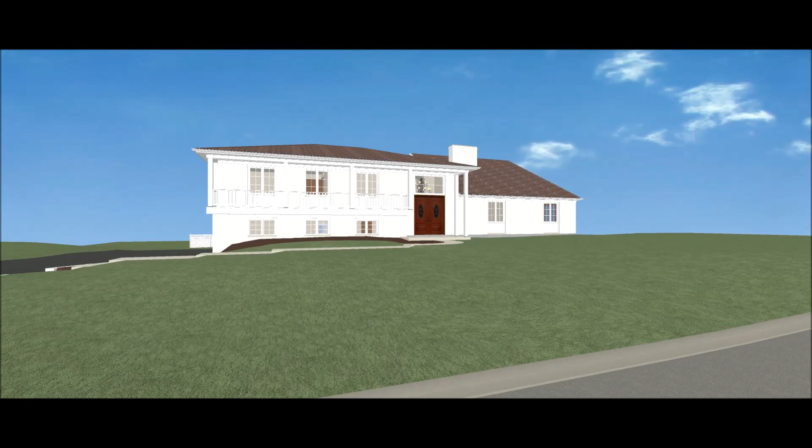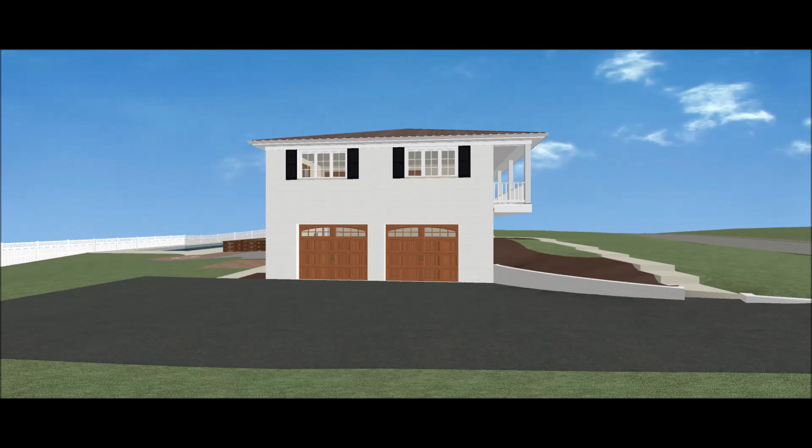Alright, I've finished constructing this model and the necessary out structures and terrain that I thought was going to be having to interface with any new structures we put together. Some of this wasn't entirely necessary, but most of it was because of the scale of the project and some of the future plans, both on the first floor and at that second floor level.

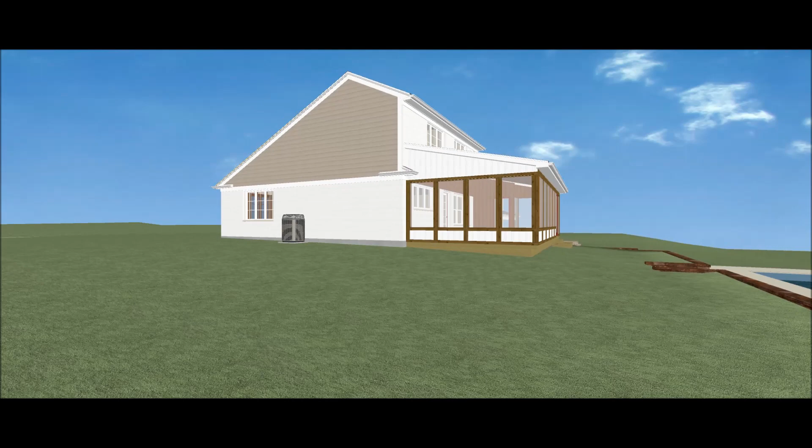And as I went along adding these pieces, I was glad that I did, because there's so much going on, and I want to make sure that whatever we add going forward actually brings all of this together in a nice, functional, and aesthetic way. And so this, the first in probably a series of films, is really just an introductory type of thing, introducing some of the challenges that we're going to be facing, and some critical pieces that probably have to be decided fairly early on.

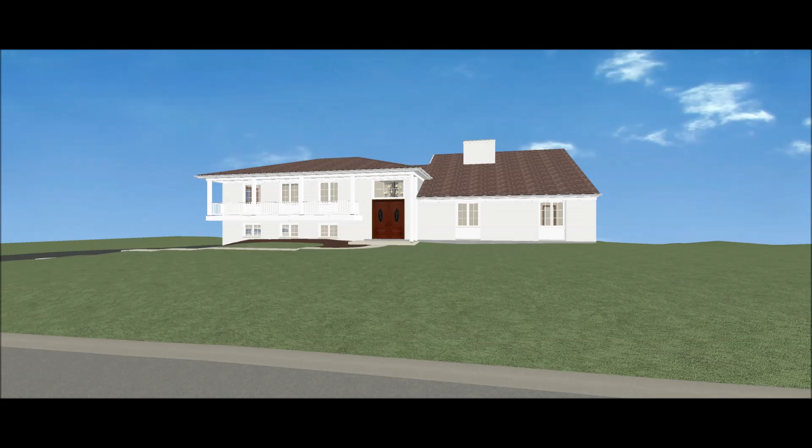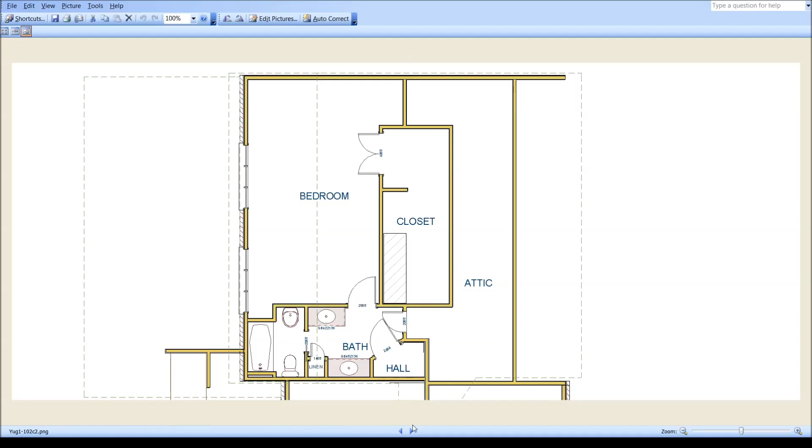So I've gotten all three of these floor plans, the lower level, the mid-level or the main level, and the second floor level, constructed, and everything agrees within about an inch or two, which is kind of necessary to make sure that we understand how everything's being put together. And going forward, we'll be concentrating mainly on what we'll call the second floor and the first floor, even though this first floor extends down to this lower level.

So mostly we'll be looking at this, and obviously the covered patio isn't right outside of bedroom 3, but outside of the lower level. But for the sake of clarity, we'll just work with this level here in terms of this first floor, since we're starting from a kitchen design standpoint anyway.

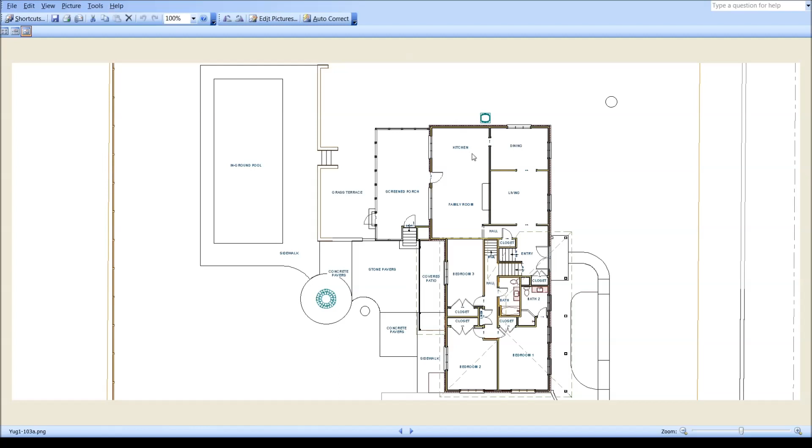Part of putting together all this stuff was making sure we knew exactly where these different levels were and how they interfaced with one another. And all of this can stay, and we're going to be building around that and hoping to make these places or these spaces work together.

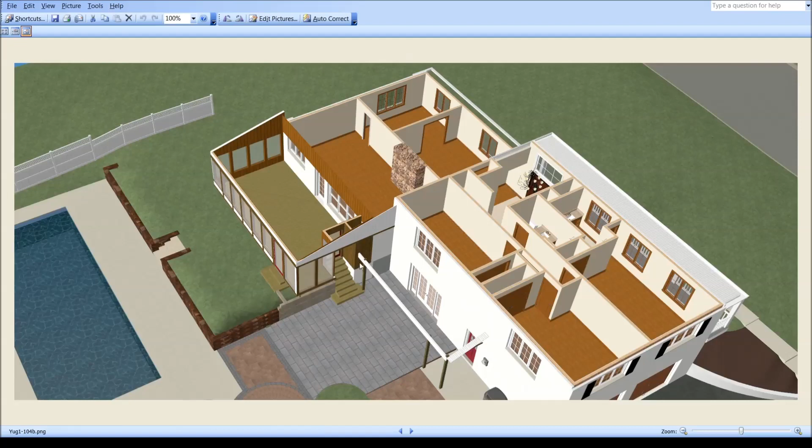And while this is a short film, there will be a number of things that I'll be trying to cover, kind of unrelated, but I can't help but at least address a few of the things that I saw while I was out. We have already talked about whatever happens up here. We know those stairs, I haven't even modeled those because we knew that we were going to be changing those to be code compliant. They're too steep right now.

From out here, one of the first things that struck me, and I'll just cover this stuff randomly. For one thing, I noticed one of my photos shows this piece here, there doesn't appear to be any kind of flashing between the new Hardie siding up here and this piece of frieze board here. It seems to me there should be some sort of Z flashing in there, because otherwise you're going to have to either caulk that or rely on I don't know what to keep the water from going back behind that board. So that was one thing I saw.

But the juxtaposition of these two pieces, they don't seem to work that well together. The higher pitch slope here, and so they're competing for power at the front, and so hopefully we can get that a little more balanced going forward.

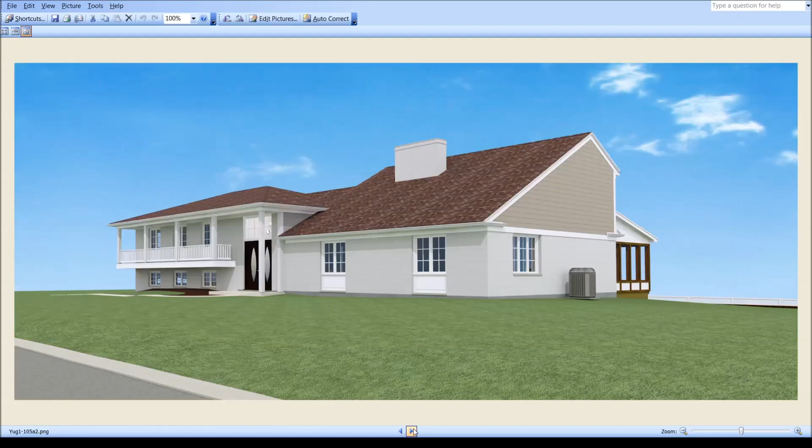So while our go-in project is this first floor addition to the kitchen and the family room, it's going to be impossible to look at that without looking at this at the same time, and it actually begins to occur to me it may be, not impossible, but a lot more challenging to construct those as two separate projects. And I'll try to show you why going forward.

But I do have some exciting ideas of how all of this can look together, and I'm eager to try those out, but I just want to show you some of this early stuff right off.

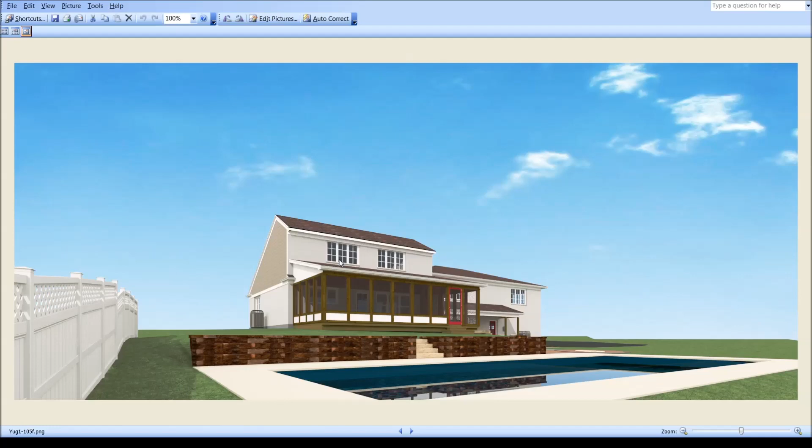So first, as a matter of course, I checked these member sizes, these 2x10s at 16 inches on center over the garage, and cantilevered here and here, and these ones that are under the second floor and over the kitchen and family room, since we're going to be dealing with suspending those or doing something to handle those.

And these are 2x8s at 16 inches on center. And these are the labels. 2A, these are the ones that are underneath the bathroom portion of that second floor, and these are the ones that are under the bedroom portion of the second floor, since those are different loading requirements by code.

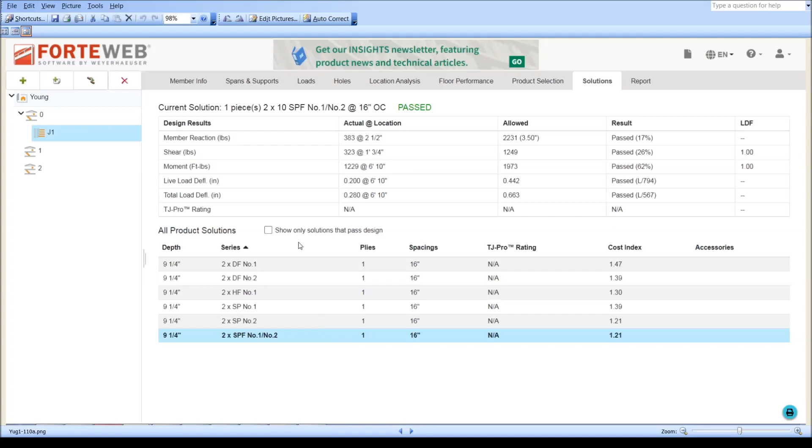And so, as expected, the ones over the garage and over the lower level underneath those bedrooms on the main level or the mid-level, those all pass. Even the lowest grade of them passes at that span. But when we come to the second floor, these J2A, these are the ones under the bathroom, which require a little heavier loading. And I select this in a program I use to check and size these members.

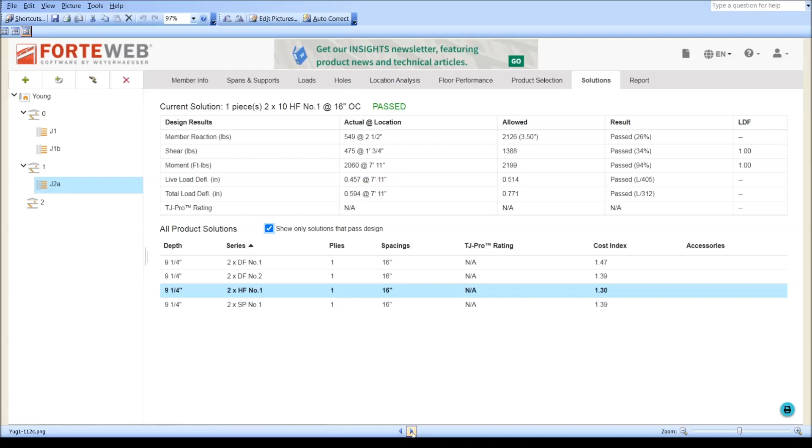And I check either 2x8s or 2x10s at 16 inches on center with a single ply. The only thing that's really going to pass is 2x10s. If you check this off and get rid of the ones that are not passing, only 2x10s will technically pass, crossing over that kitchen and family room area. And you can see if I go to 2x8s, which is what exists up there, and it exists as Southern Yellow Pine, none of these species are passing right here. They just don't pass 2x8s.

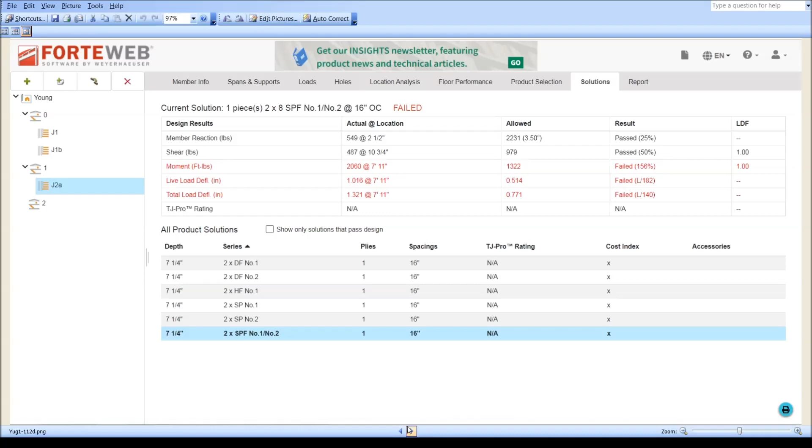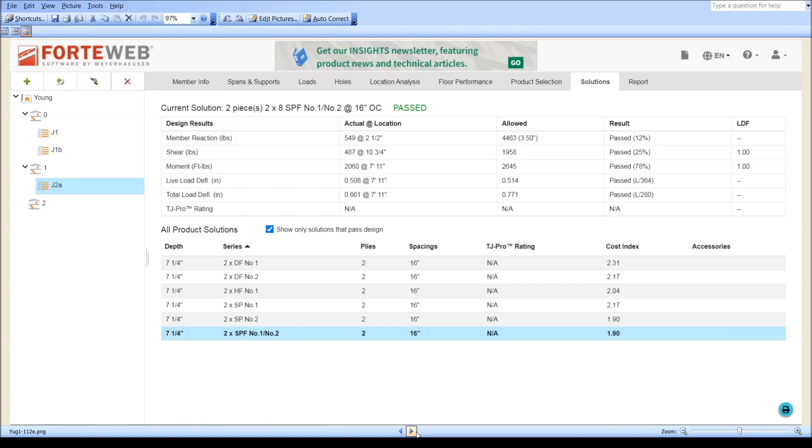Now, the one way to get this 2x8 situation to pass without increasing the depth of that diaphragm, we could double the 2x8s, and that means either removing that floor or removing the ceiling, so it's not going to be painless. But to get those to pass, and I think they're going to require them to pass in the new plan. And I know that probably wasn't too clear,

but just so you can understand, if I go back and specify the best case scenario of what you have, which is Southern Pine as those floor joists, 2x8s, 16 inches on center, and 1 ply, these are the results we get for under the bathroom areas, and you can see that its failure here is by about 400 or 500 pounds per joist, and other failures down the road, and that's for the ones that require the heavier bathroom loading. But even the bedroom ones are still failing by pretty substantial numbers.

So, that being said, and you being aware of that, if you are not inclined to replace them, it may be possible to double them, or replace them, or add 2x10s, or whatever the solution might end up being. If you're unwilling or unable to do that, I will have to double check, but it may be that they will allow those as existing members. However, I kind of think they may not, because we are thinking about increasing the size of that bathroom, which would be changing the configuration, adding loading to some of those joists, and adding loading beyond what is passing or what is allowed by the code.

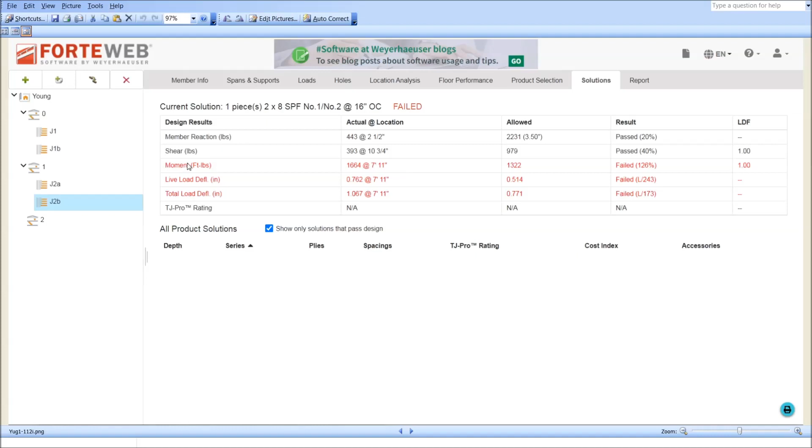So my tendency is to think that they're not going to allow us. They'll allow them to stay there, but I don't think they'll allow us to change that floor plan and add any new loading to them.

So what this means in terms of the construction, in terms of the design, is that has to be accounted for up front, what we're going to do with regard to that, and what it would require to get it completely in code and nice and rigid for your own use going forward. I mean, you probably feel more flex up there than you really ought to in a bedroom area. But what it would require then is removing all of that and just dropping new 2x10s in. I would just drop 2x10s across the whole thing rather than trying to double up 2x8s along each one.

There's probably going to be some mechanicals, wires and stuff to deal with. So there's a lot to consider with regard to that, and I'm sorry to say that. And additionally, with this second floor piece, one of the things that concerns me about this room is that apparently these members were taken out.

You know, a person might think those were just decorative, but I'm not an engineer, but it seems to me that those were probably structural members. I don't know if they did this renovation project, removing those and moving the walls around, under a permit.

But when you look at this situation here, which I don't quite understand, I don't know if they've removed all these, but all these pieces up here and all these pieces down here, I have a feeling that those were pretty integral to that structure. And maybe that's why those 2x8s were passed. Maybe this was even done under a permit. This was back in '97, so I don't think there's going to be records.

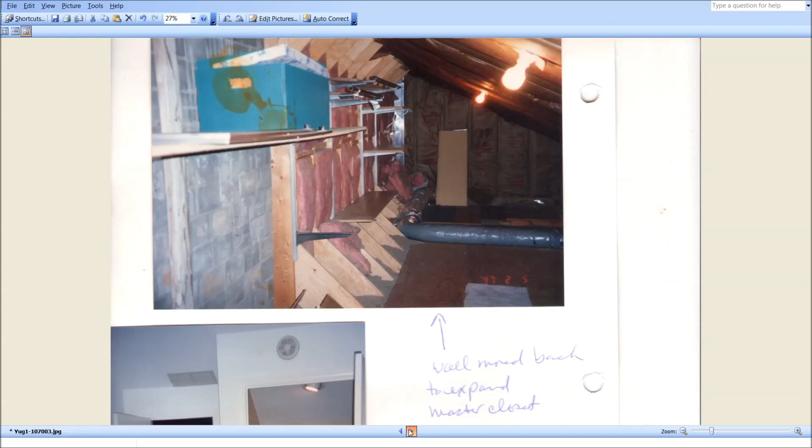But it's just something that is a concern to me, them having taken out these big pieces here, because we've already got this roof under stress with this skylight framing, and they removed those, and I don't know about that, but I can't know for sure.

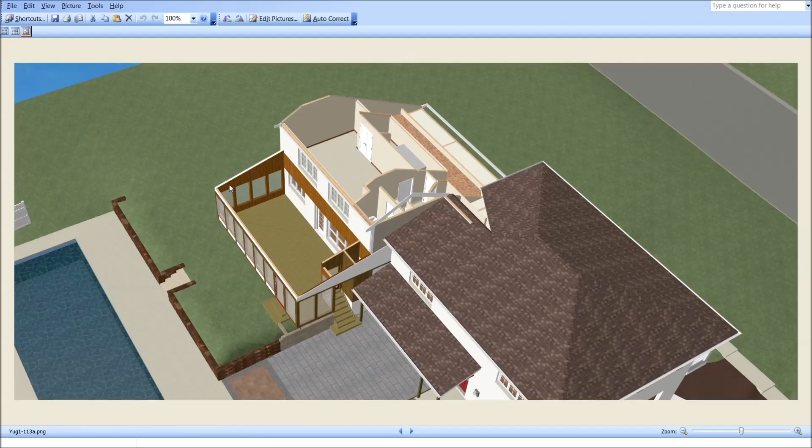In any event, any new design is going to have to pass their code requirements or anything that they're going to require, and maybe this might even require some sort of engineering at this level because of these issues. So I just wanted to mention that it's not going to impact our early design and some of the things that we want to look at on this first floor, but it will have an impact going forward.

I just want to mention a couple other things with regard to where we are right now. Because I knew we were going to be designing this up here, I did want to take a quick look at what kind of area we had to work with. And that bedroom down in the lower right corner, bedroom number 1, that is 305 square feet including the bathroom.

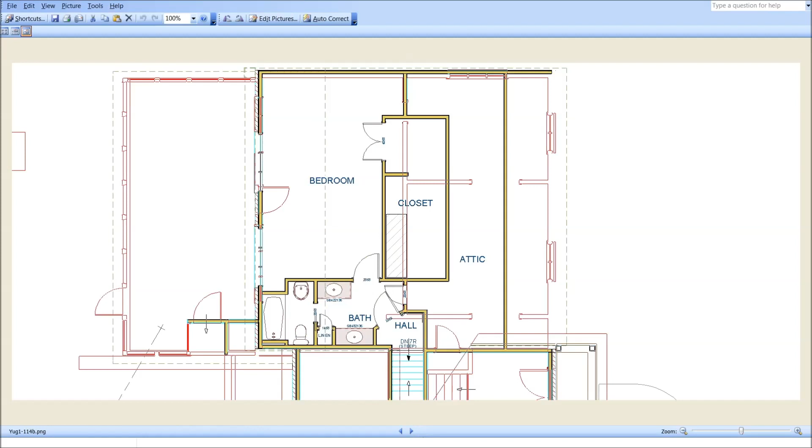And this is the footprint of that big front bedroom here. So there is room to expand this here. We still have to get a hall through here, but I think there's room to expand that bathroom at that level. You see the first floor walls underneath here.

And this is a section through here, and this orange is at least ostensibly the joist that you would have to double. You wouldn't have to extend that doubling all the way over this area out here in the back side of the closet, but to make that completely meet code, you'd have to replace or double those ones through that area there.

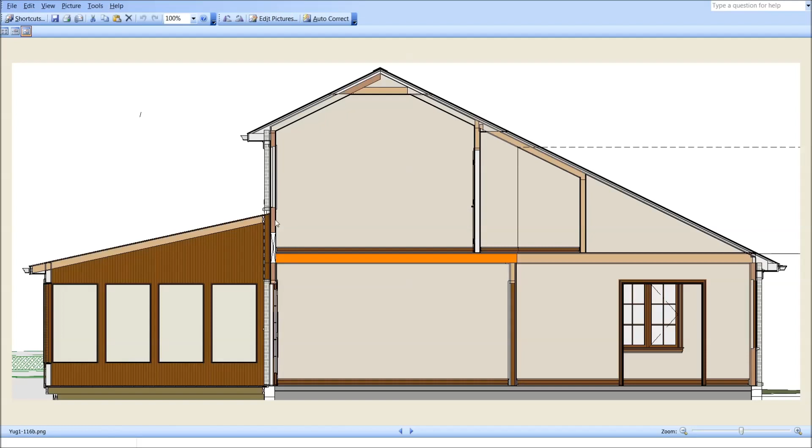And then there's a case of how we're going to beam this off to open that up for the kitchen expansion here, whether there's a drop beam or whether that's pushed up into the wall, here you see the beam. I don't think even with the biggest beam pushed up into the wall that we can do that 30 feet or so across there, from here to here, with a single span. I don't know that yet, but we'll be looking at it going forward.

And I don't yet know how much we're going to increase this. It's 13.4 from the face of that fireplace. It's closer to 12 from the face of the hearth. I don't know how much space we're going to need to create what we need in this kitchen. The kitchen is probably going to be the driver of how wide this becomes.

But that is as far as I am, and now I'm going to begin actually putting some new pieces on this first floor and seeing how this impacts the whole thing.